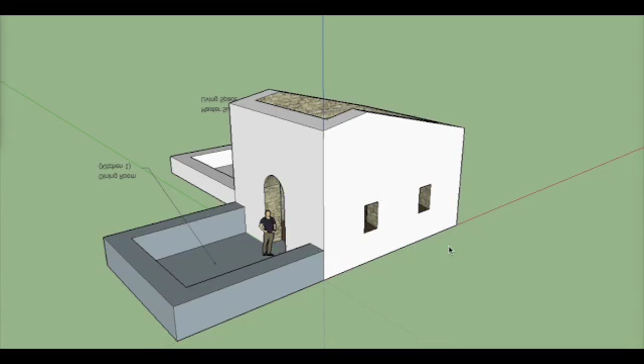This is the model that I sent you before. You have the kitchen one, which I'm now calling the dining room. The walls obviously go higher than that, just trying to give you perspective. This is a full wall now, but I put a doorway through here.

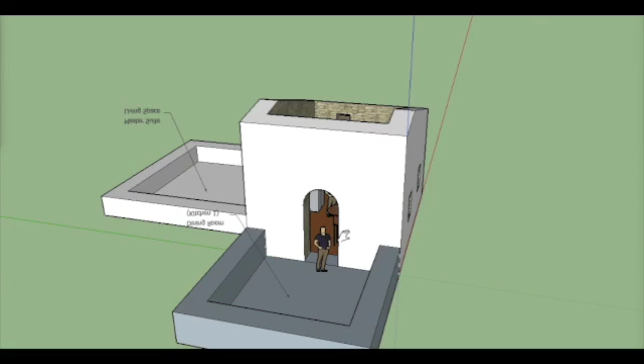Showing it as an arched doorway. Without major construction issues, I can use up to 30% of the surface of the wall for a doorway, so that's roughly the size the doorway would be.

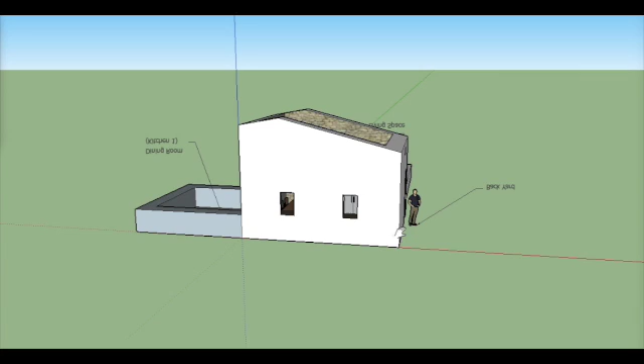Everything over here would be what I call the backyard. So those are the two windows of kitchen 2 and kitchen 3. Currently there's a wall dividing these two, but it's a very thin non-load-bearing wall. There is no existing floor up here, although there are beams and cross beams that indicate that once was another level above kitchen 2 and kitchen 3.

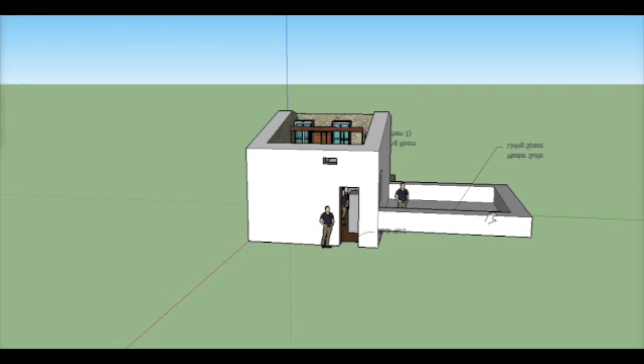Continuing down the side of the house, this is where the living space of the master suite is. There is no door now, but a door could go in here, or there's a couple of options. This one represents the door on the left.

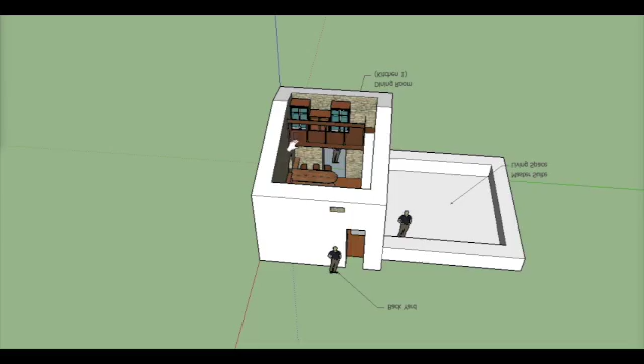I have not put a second floor in kitchens 2 and 3's space. What I have done is put a balcony, for lack of a better term, with some storage cabinets above - general storage or a pantry or whatever - with some stairs going up. Right now it looks like a slide, but those are meant to be stairs or a ladder, something along those lines.

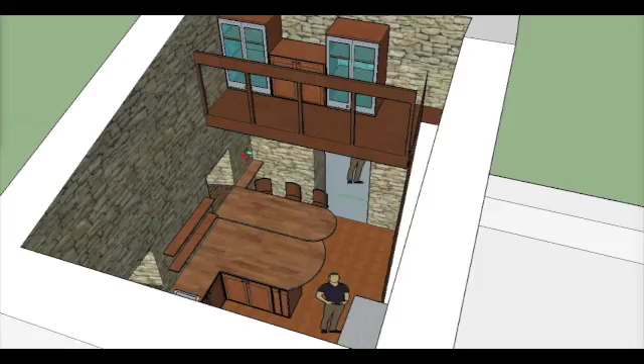So this is roughly what the space looks like as modeled. There's a door to the backyard directly off the kitchen.

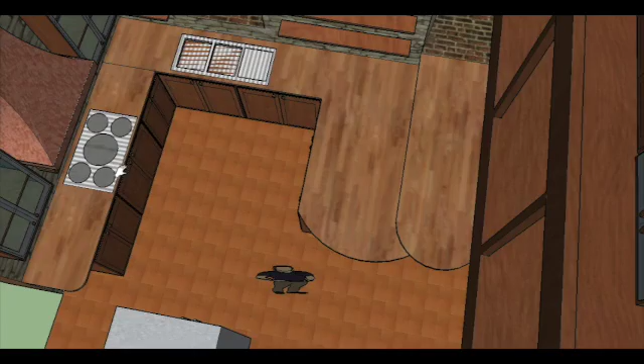A U-shaped counter space with a stovetop that I've put against this wall, for two reasons. Number one, that would make punching a hole through the wall for the vent easy - easier than putting it somewhere else and having to route the exhaust piping.

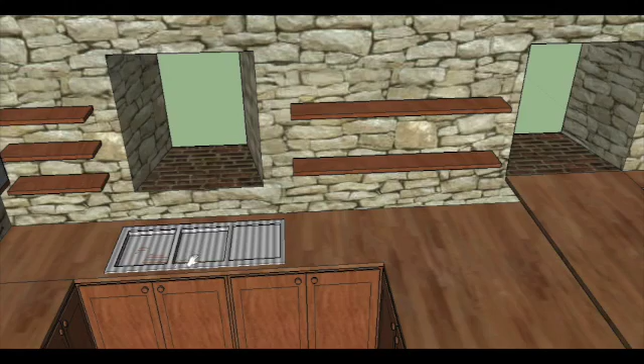Secondly, that allows me to put the sinks in front of the window. This would be the window to kitchen 3, and that's the window to kitchen 2. So the sink here would look out on - just out here somewhere is the 900-year-old castle. This gives you an idea of roughly what the space looks like.

Aerial view here. So I've stuck a refrigerator against this wall. Again, this U-topped counter shape at normal counter height.

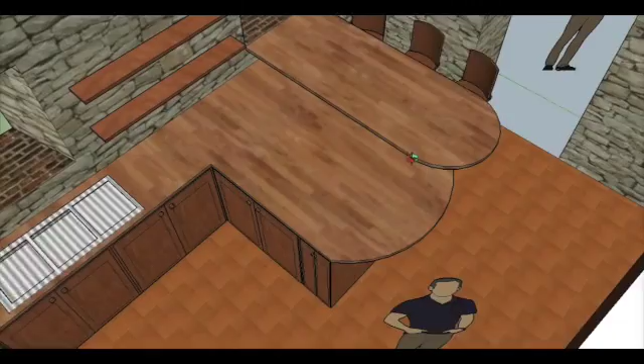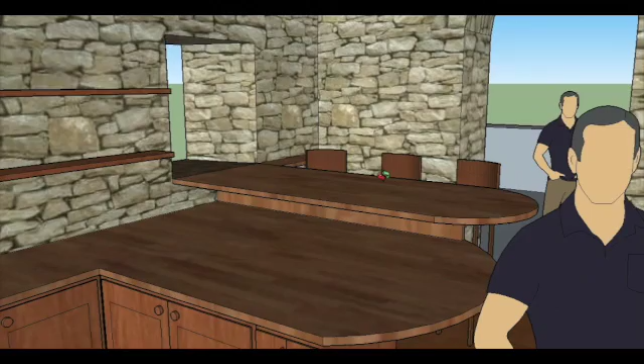And then a slightly raised bar here - a good place to sit and work and eat, watch somebody cook, something along those lines. And again, the arched doorway going into what I'm now calling the dining room.

And from up here, give you a small sense - if this thing will pay attention to what I want it to do - a small sense of how this would look from the balcony. Here.

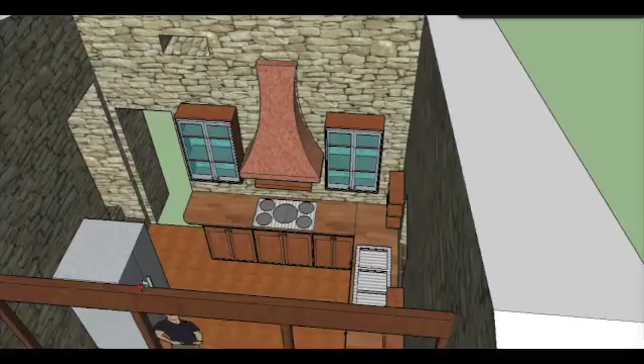And the door, again, directly to the backyard at roughly ground height, depending if I have to build up some ground or build a small set of staircases in. The living space of the master suite over here is, I don't know, 2 to 2.5 feet higher than the floor would be of kitchens 2 and 3 combined.

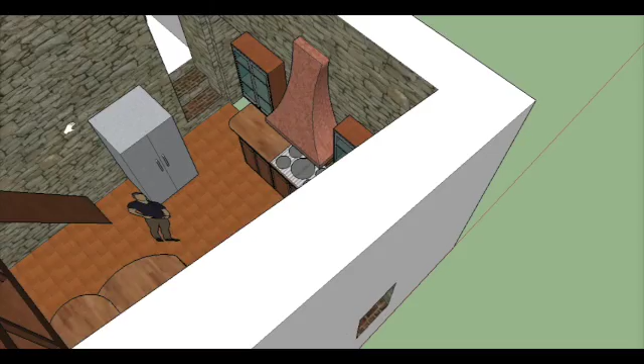So knock through a wall, put the staircase inside the wall. Almost all of these walls, both internal and external, are anywhere between 2 foot and 2 foot 4 inches thick, so they are pretty stout walls.

Again, that gives you an idea of at least a little bit of a 3D view of what the kitchen sort of looks like if you're walking around it. Again, only my first ideas - plenty better ideas I'm sure will come along at some point later.